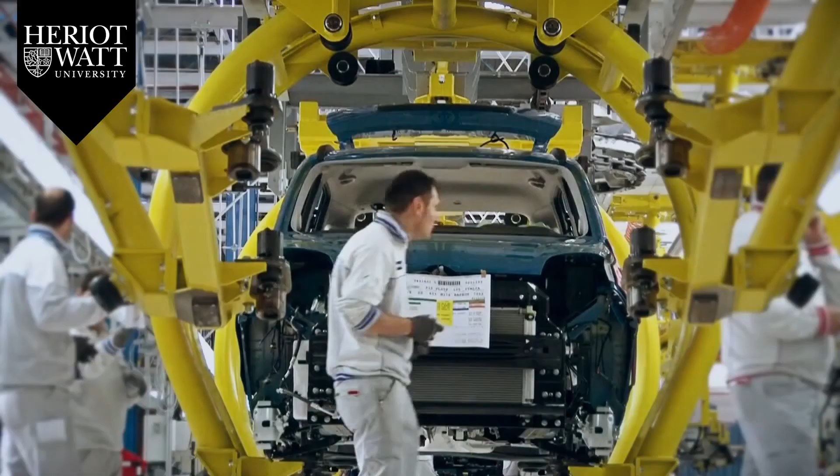...triggering air temperatures, causing high levels of urban heat island effect due to high density population, transportation and buildings emitting massive amounts of heat into the atmosphere. The building sector, with uncontrollable dependency on services like air conditioning, lighting, refrigeration, etc., is claimed to be one of the biggest energy consumers, consuming nearly 40% of the global energy, along with emitting around one-third of all greenhouse gases.

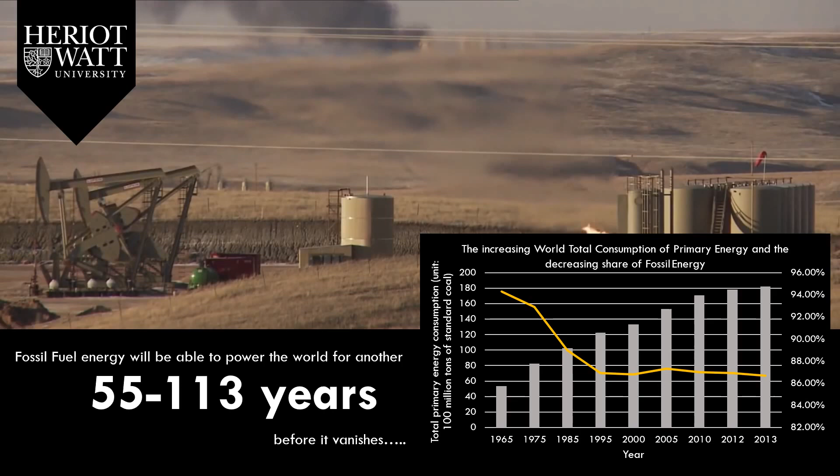Additionally, at the rate at which fossil fuel energy is currently powering the building sector, studies are reporting a gradual decrease in the fossil fuel source, and have also highlighted fossil fuels to vanish in the next 55 to 113 years. The reduction of the building energy consumption and dependency on fossil fuel energy stands as the highest priority for the UAE government, predominantly due to UAE's building sector consuming nearly 70 to 80% of the country's total generated electricity.

With increasing population, rapid climate change, and severe depletion in fossil fuel energy, the demand for renewable-based energy generation is increasing rapidly. Consequently, UAE is at the forefront of altering the trend towards dependency on renewables, in alignment with initiatives at the international level such as the United Nations Sustainable Development Goal 7 of access to affordable and clean energy, and local levels such as Dubai's Clean Energy Strategy 2050, where Dubai aims to increase the clean energy share to 75% by 2050.

UAE is constantly working towards this goal not just through solar power and nuclear energy, but also through wind energy, though the region experiences low wind trends. As a first step, UAE installed the region's first wind turbine on Sir Bani Yas island, having a production capacity of 850 kW per hour.

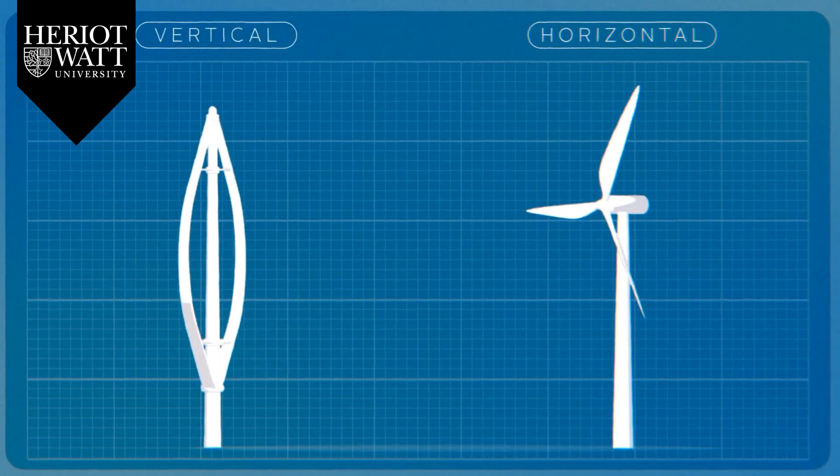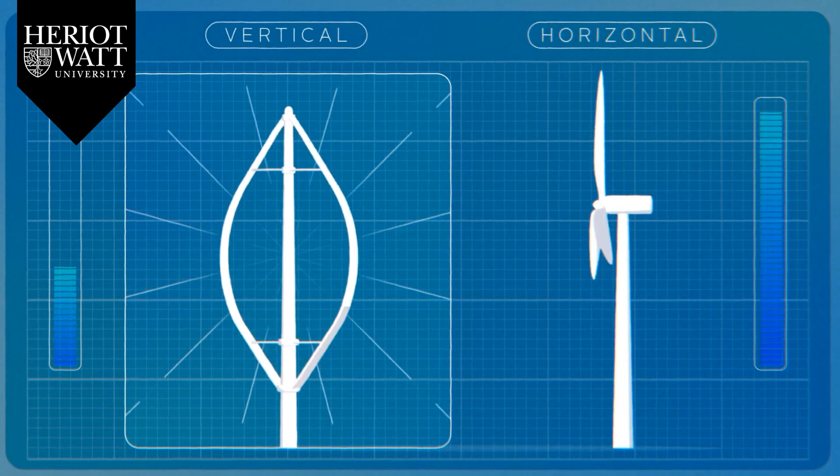Over the years, wind turbines have drastically evolved from traditional turbines. Currently, there are two major operational types of wind turbine technologies that can be used in building applications. These are classified into vertical axis wind turbines and horizontal axis wind turbines. Even after the application of these improved turbine designs, wind turbines were not able to reach the predicted efficiency. So there was a need to focus more on efficiency and a less complex concept, to result in investing more in wind energy to augment turbine power, especially in the case of horizontal axis wind turbines.

There was a need for a new and efficient type of wind turbine in the industry, along with its application in small housing rather than focusing only on large-scale buildings, which led to the introduction of the concept of Diffuser Augmented Wind Turbines, also known as DAWT. Diffuser augmented wind turbines were introduced to increase the efficiency of the wind turbine by having the turbine enclosed by a duct-like shroud. In recent years, several studies have been conducted on the development of the DAWT and its concept, particularly on an optimal design of the shroud and on different strategies to accelerate wind speed and generate required energy.

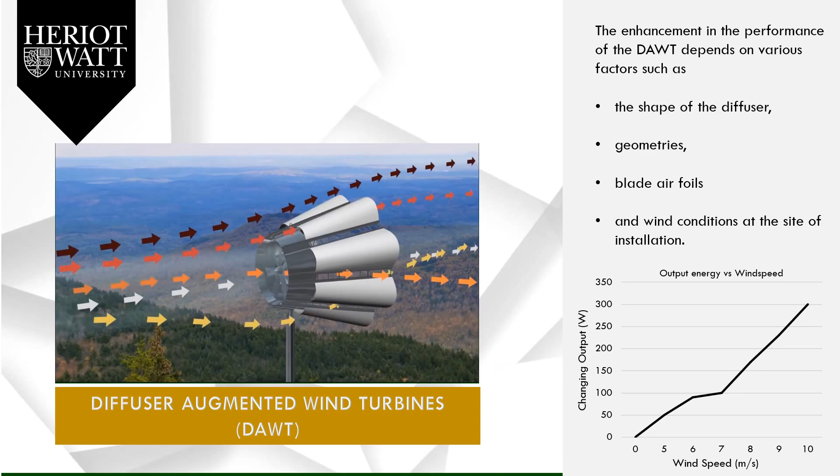The enhancement in the performance of the DAWT depends on various factors such as the shape of the diffuser, geometries, blade airfoils, and wind conditions at the site of installation. The geometric features are the key parameters in deciding the aerodynamic performance of the wind turbine. Each one of these parameters has a direct or indirect effect on the performance of the DAWT. Various literature has highlighted the design alteration of introducing curvatures in the interior of the turbine and reducing the area of the airflow to cause higher pressure drops. Consequently, velocity increases with decreasing area if the flow rate is constant.

Considering this design principle, our research aims to test various geometries to attain optimal performance of a DAWT, especially in low wind regions such as the UAE. In alignment with the research aim, the research methodology involved designing 4 different wind turbine geometries with varying parameters in a 3D modeling software and analyzing them through computational fluid dynamics software.

Solid Edge was utilized as the parametric solid modeling software for the experimental process. Solid Edge is a user-friendly software which can easily be exported into ANSYS CFD for further simulations. A total of 4 models were used for the comparative analysis. All the models are created following the Venturi principle, having bigger entry openings and comparatively smaller diameters for the exit openings.

The first diffuser for the comparative study has a conventional shape which is typically employed in the industry. The cross-section and visual representation of the model is as follows. The second diffuser has a straight, smooth external surface in comparison to the first one, while the interior surface has a protrusion similar to that of a flower. The cross-section and visual representation of the model is as follows.

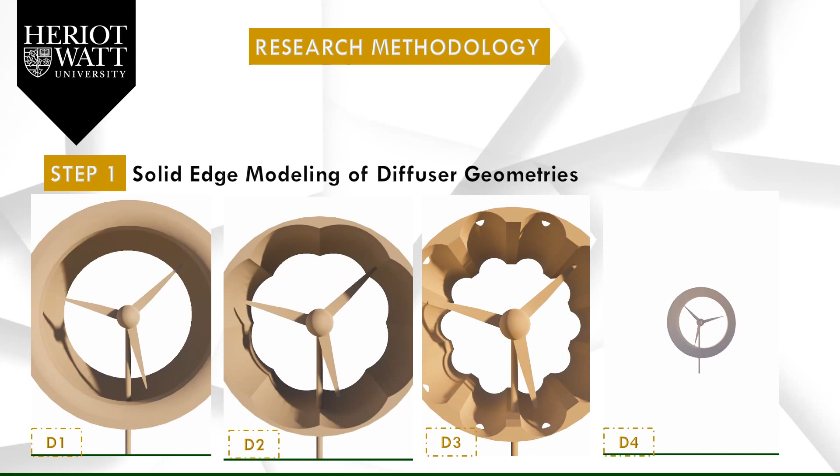The fourth diffuser has a unique configuration in comparison to the other three models. The fourth model has a significant decrease in the thickness and length of the model. Additionally, the diffuser also has added material around the exit diameter to check if the pressure drop would significantly increase due to vortices around the free edge of the fourth model.

The four model shapes were then exported to ANSYS computational fluid dynamics software to carry out the simulations. Before the extraction of the results, the models were processed through steps such as mesh generation and assigning of required boundary conditions. Meshing is an essential intermediate step that influences accuracy of results. The model showed positive results at a resolution value of 7, and the inflation boundaries were set to program control with a tetrahedron mesh, which fits complex geometries better than any other type of mesh.

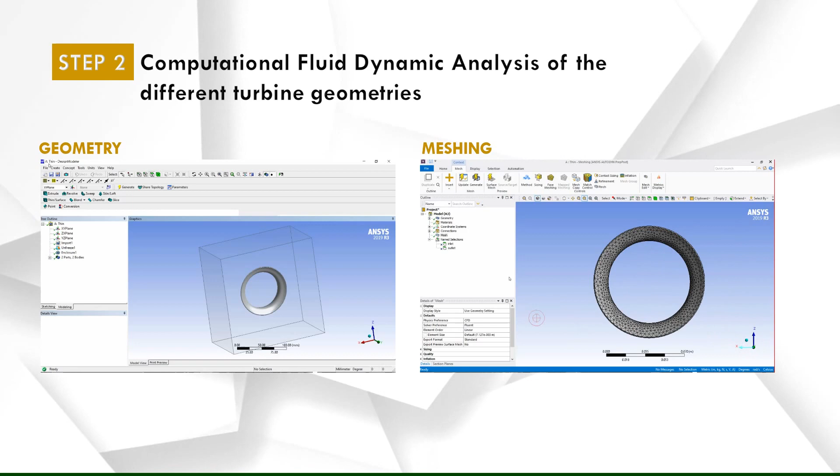Under the boundary condition, 3.5 meters per second was assigned as the inlet speed for each simulation in accordance with the average wind speed in the UAE. The maximum diameter for efficient simulation was kept as 100 mm with the y-axis as a constant axis of revolution. The inlets and outlets for each simulation were placed on the exit planes on either side of the diffuser. Iterations were conducted through hybrid initialization and calculation, where the values converged between the range of 50 to 150 depending on the geometry of the models.

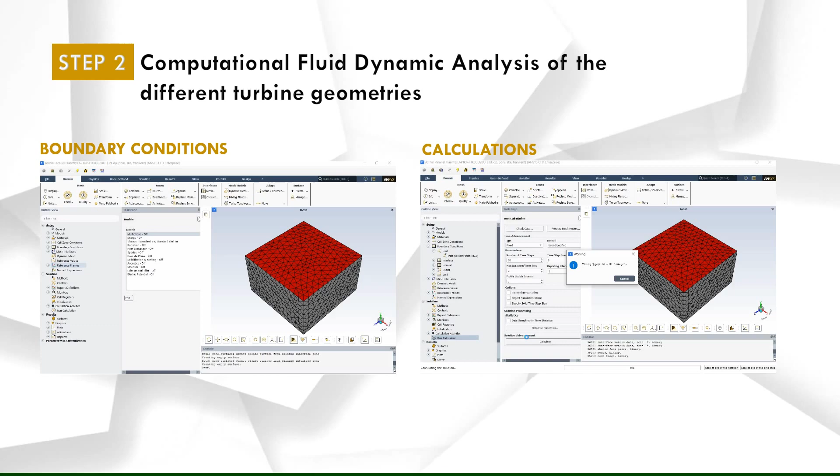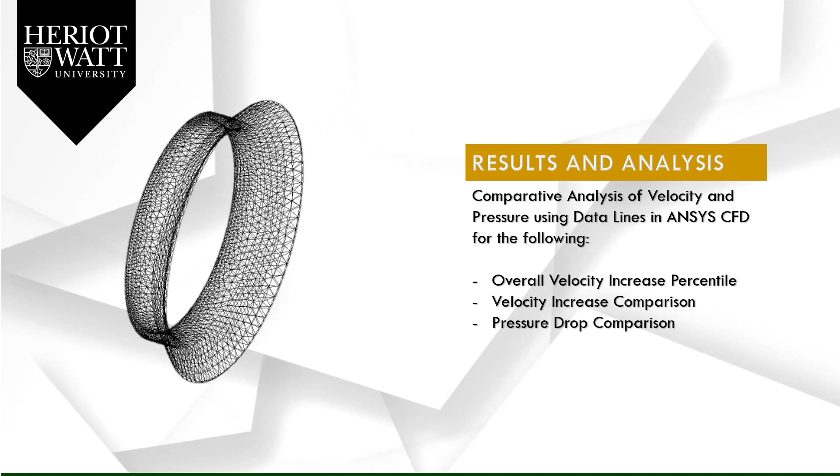The results and analysis of the study are done through a comparative analysis between the four shapes of turbines, focused on the observed pressure losses and subsequent acceleration in wind speeds through each of them. A sophisticated methodology was put into place to observe the parameters within the confines of the turbine. The identities of the turbines were classified numerically with the provision of a single word description of its shape. Subsequently, lines were plotted at the entry, middle, and exit on an axial plane, and a radial line was plotted across the cross section of each turbine to enable the collection of data along these lines.

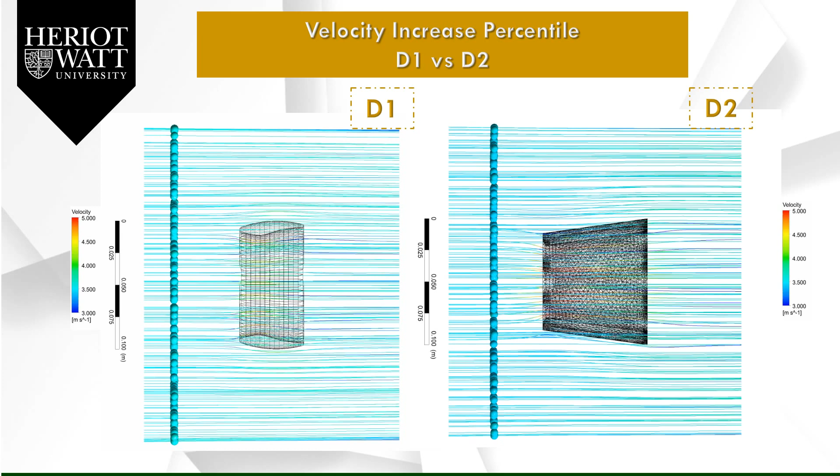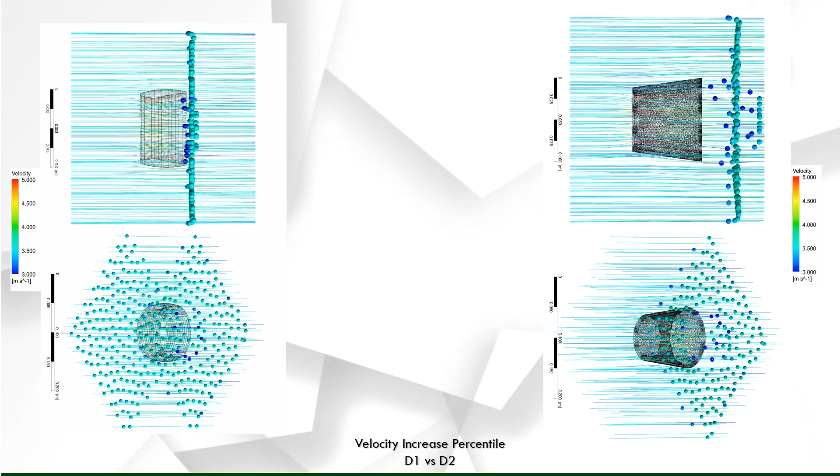Velocity streamlines are shown through 200 data points on a 2D plane from the top of each turbine and an axonometric view to understand the scope of acceleration. Graphical comparison between the first two turbines D1 and D2 signifies that D2 achieves higher acceleration. Since the minimum average velocity of 3 meters per second is attained by ambient average wind speeds in the UAE, the percentage increase in velocity is given more importance. Therefore, through data analysis, D1 and D2 achieve 22.78% and 57.24% increase in maximum velocity.

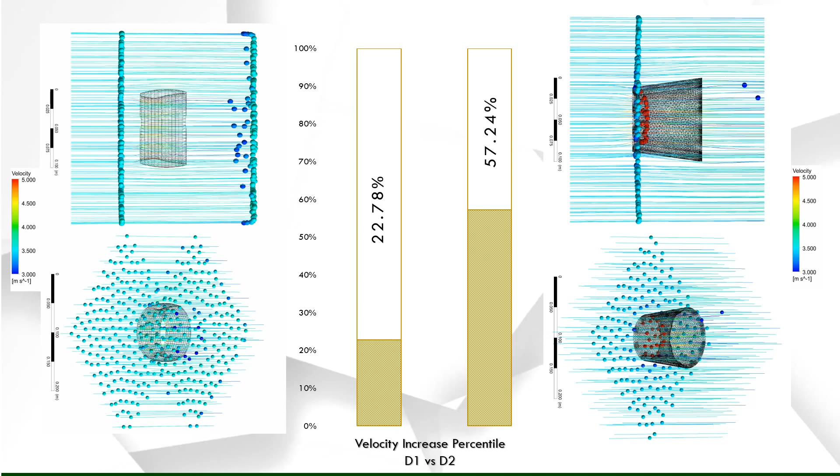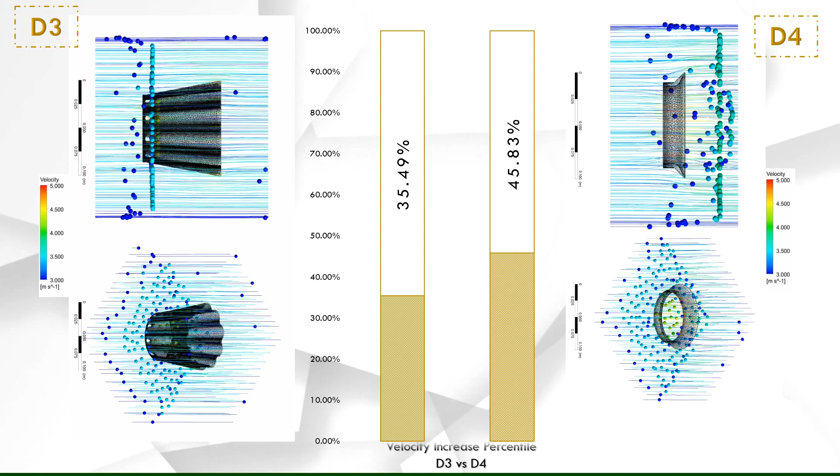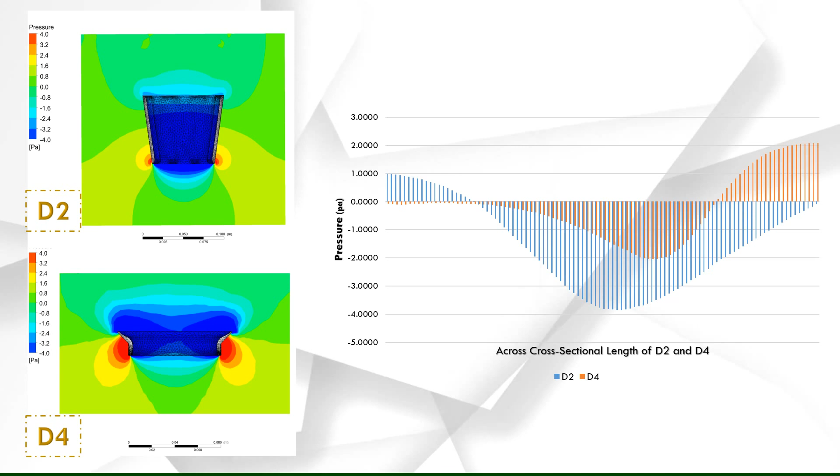Similarly, the graphical comparison between D3 and D4 signifies a higher acceleration in D4, by 35.49% and 45.83% respectively, as shown in the illustrations. The comparative analysis of velocity signified that D2 and D4 perform most efficiently among the four turbines. Therefore, the pressure losses across the length of the turbines on the radial data line plot were determined as shown in the chart below. The average pressure loss in the central plane of D2 and D4 are shown in the figures to illustrate the area of pressure losses due to the turbine's geometry.

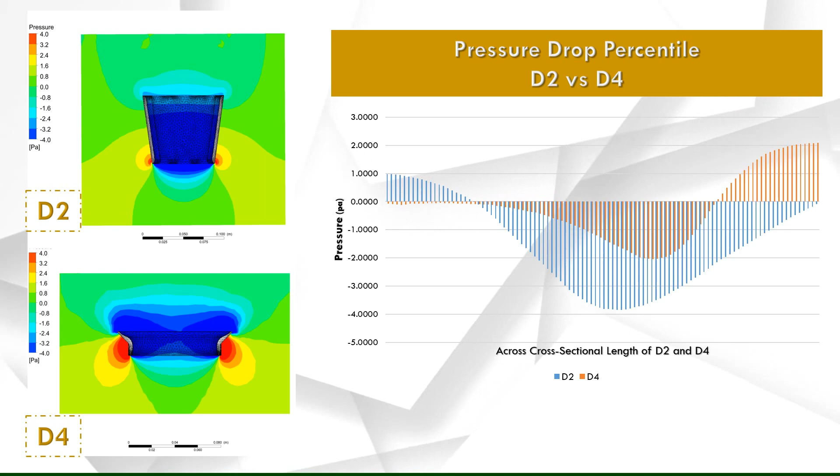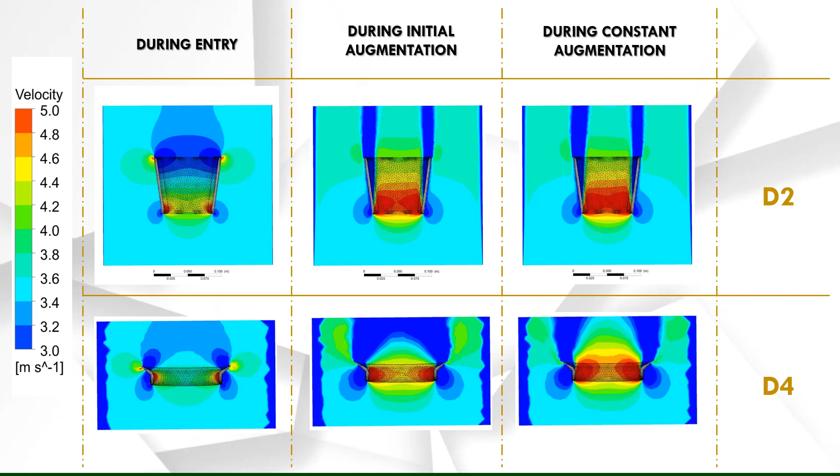D2, due to its longer length, has higher pressure losses for a larger area in comparison to D4. This is reflected in the velocity comparison, wherein D2 and D4 have augmentations of 57.24% and 45.83% respectively. Although the principles behind all the geometries remain the same, the inventive shapes of D2 and D4 have performed well under simulative conditions. Their velocity contours during entry, initial augmentation and constant augmentation are shown in the figures and will determine the plane of fan placement for the most efficient augmentation. These simulations can further be developed for these shapes to be polydirectional and achieve even greater augmentation.